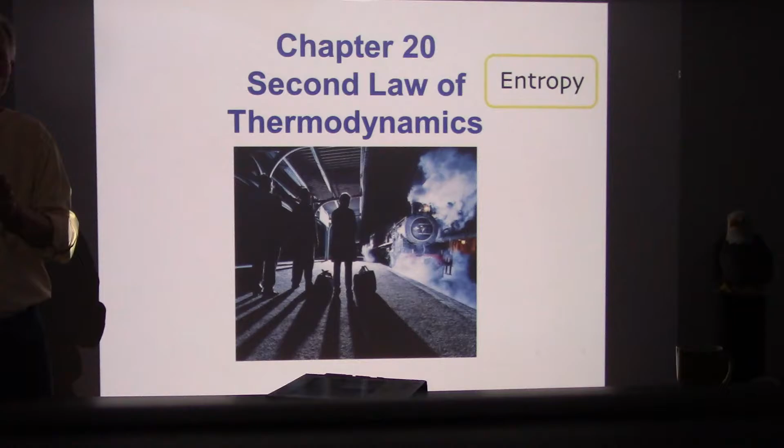Chapter 19 was the first law of thermodynamics, which was energy conservation. Chapter 20 is titled the second law of thermodynamics, and this is a little more difficult to explain. It's based on the principle of entropy. If you've heard about entropy, if you watch different science shows, listen to science blogs or podcasts, then you are familiar with it. Let's get into some of the topics and see what we are getting ourselves into. This is the last chapter of the semester, so this is kind of exciting.

The second law of thermodynamics is a statement about which processes occur naturally and which don't. Does that tell us anything? No, but here's the statement: heat can transfer spontaneously from a higher temperature region to a lower temperature region.

We understand that now because in the higher temperature region, the molecules have above average energy, and in the lower temperature region the molecules have below average energy. Through random transfers of energy, the energy statistically evens out to what we consider the statistically most likely distribution. Back in chapter 18 we looked at that in some detail with a collection of gas molecules. So entropy is actually based on statistics.

So what we've got then is that the faster moving molecules are allowed to come into contact with the slower moving molecules, and statistically, on average, these start to pick up speed and those slow down. We call that the flow of heat, but it's really just random molecular motion, and through collisions the energy gets spread around uniformly.

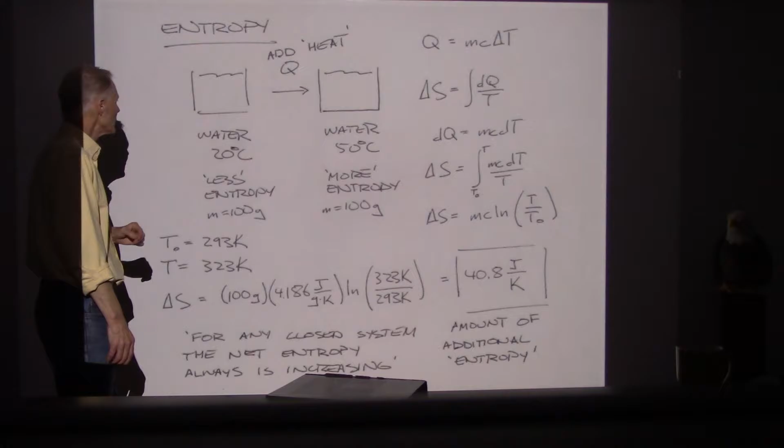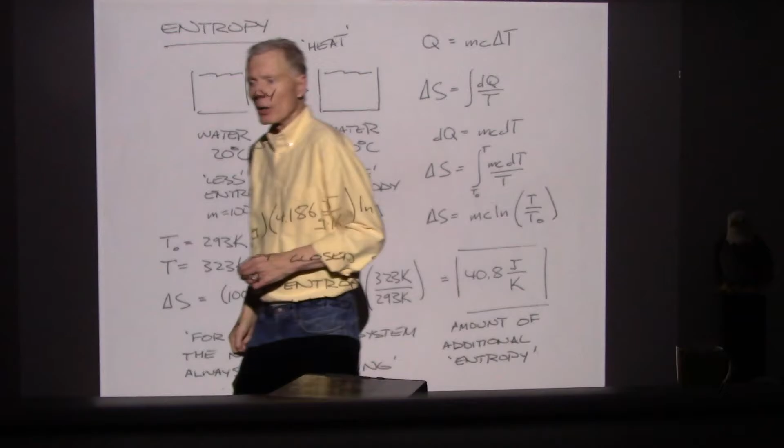So we're going to say that each side of this has a mass of 100 grams. Surprisingly, we can calculate entropy by taking the heat being transferred, dividing it through by the temperature at which that transfer takes place, and carrying out that integration, and that works. It's surprising that we can keep track of this approach to a uniform distribution of energies, the most statistically likely distribution, just by carrying out this integration.

Now the dq in here is going to be mc dt. Substitute that in, and we get a delta S formula that is the mass of the sample times the specific heat of the material times the natural logarithm of the final temperature over the original temperature. Now with these two samples, let's take the one on the left - the original temperature is 293.

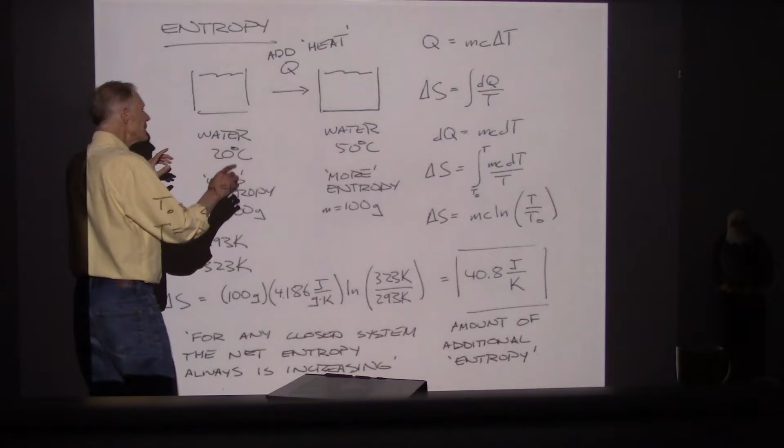Oh, I see what happened - sorry, I thought there were two samples, I guess I wrote this. So here is the sample, we're adding heat in, and we're taking just one sample, not two. We're taking one sample and raising its temperature. What's going to happen in terms of entropy?

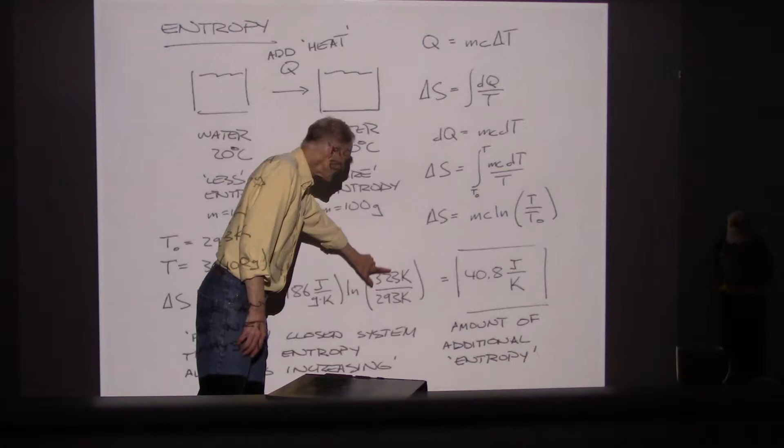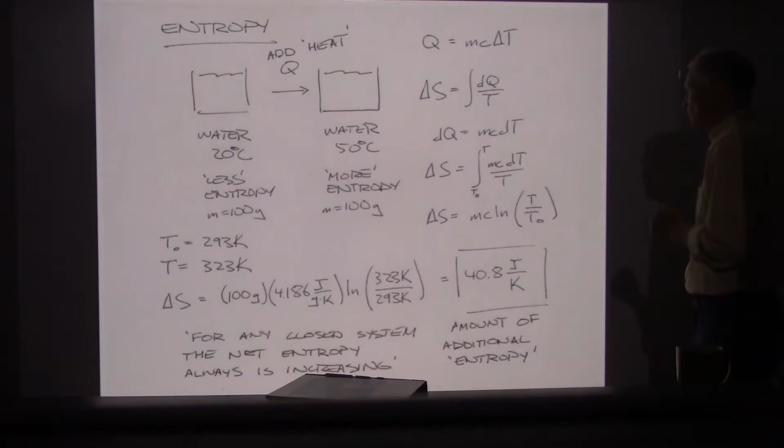So the temperature starts out at 293, it tops out at 323. That is 100 grams of water with a specific heat of 4.186, and to calculate the entropy we need the logarithm of the final over initial temperature. I carry that out, and what I get in terms of units is interesting. As we approach this most likely statistical distribution of energies, that comes out in units of joules per Kelvin - how many joules have we transferred divided by the temperature at which the energy was transferred. It turned out to be 40.8 units of entropy, joules per Kelvin.

All right, for any closed system that we follow, the net entropy always is increasing.

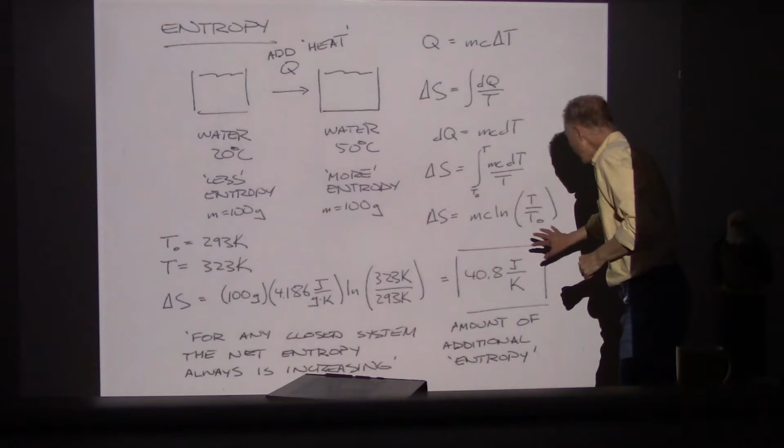Now, in this case, it's not a closed system yet, because we're only looking at one sample. We have to look and see where the heat came from to do a more complete calculation. But as far as this one sample having its temperature go up, that increases the amount of entropy.

Entropy is kind of the central feature here. I think the textbook waits and introduces entropy a little bit later, but I always feel like it's important to get the basic idea of entropy out there right away.

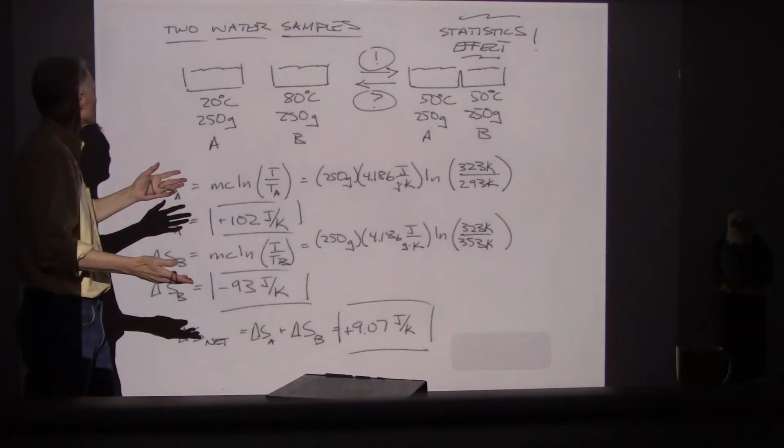So let's try another example. Here's 2 water samples. This one is 20 Celsius, this sample is at 80. There are now 2 samples, this is 250 grams, this is 250 grams. Now I put them in thermal contact. Since the specific heat for water is roughly constant, and we have equal sizes, the final equilibrium temperature will be halfway between, meaning both samples now are at 50 Celsius.

So if I look at sample A, I write delta SA equals MC logarithm of the final temperature, the final equilibrium of 50 Celsius, divided by TA. 250 grams, 4.186 joules, that's the specific heat. Now remember, that's got to be in kelvins, it's a ratio of temperatures. All the formulas we're looking at now, you've got to put the temperature in kelvins.

And again, that's one of the things I'm not very sympathetic about, is putting in Celsius instead of kelvins. So make sure you're very Kelvin oriented, and you know when you're absolutely going to need to put kelvins in. So here's the final temperature for sample A, and here is the original sample.

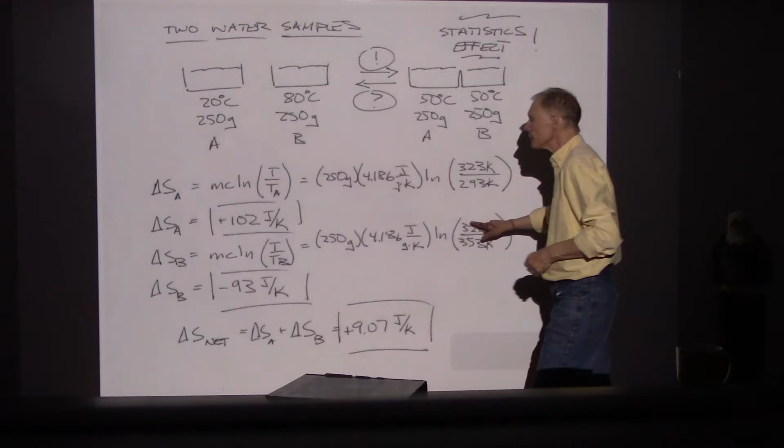Now, calculating the entropy on sample B looks very much the same, except it started at a higher temperature and ends up lower. Carrying out the calculation says the heat went into sample A, and its entropy went up. But sample B lost heat. Heat transferred away from sample B, and its entropy went down. So it's not as randomly distributed, or rather, it just doesn't have as much entropy.

At lower temperatures, there are fewer options for your molecules. So in general, if you go to higher temperatures, the entropy will go up, because the molecules have more options if you've got more energy. And that means they can reach different speeds and kinetic energies that weren't accessible to them before, and that means the distributions of all the kinetic energies represent more entropy.

So sample A boosted its entropy by 102. Now when we finish, they both have the same amount of entropy and energy, but the entropy in sample A went up by 102, and the entropy in sample B went down by 93. Now, why are they different? Because the heat was transferred at different temperatures.

So what that says is anytime we go from 2 samples that have different temperatures and then move toward thermal equilibrium, the overall entropy - if I add the entropy increase and the entropy decrease - it's positive. So a positive number for entropy says this process is not reversible.

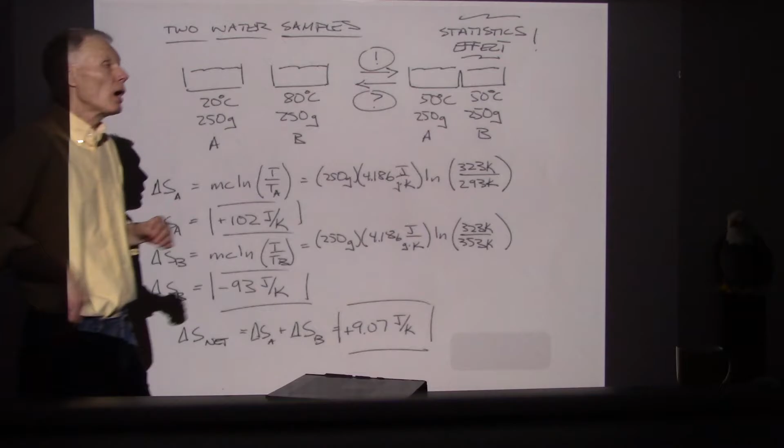Now, energy conservation says why? Energy conservation says that going this direction or this direction, who cares - they both represent the same amount of energy. So the first law is not enough to explain why this process goes from left to right, but it does not spontaneously go back.

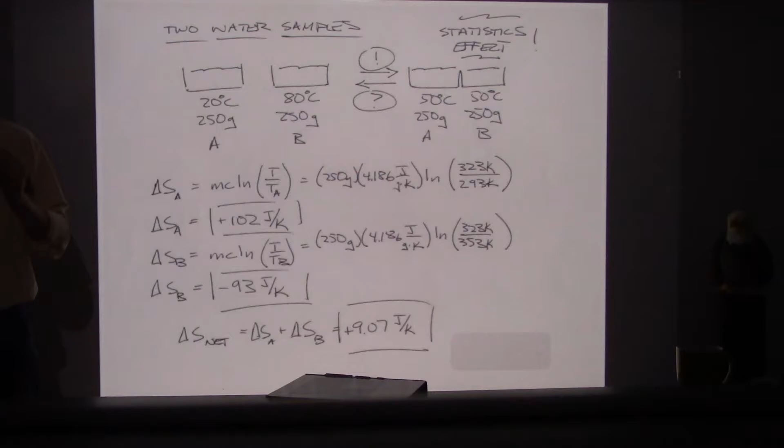Okay? It won't - once you have mixed hot and cold water, nature is not going back. The overall entropy in the universe has gone up, and you can't get back to the entropy levels you had before. So think carefully before you mix hot and cold water. Remember, the universe can't go back to the state it was in before that happened.

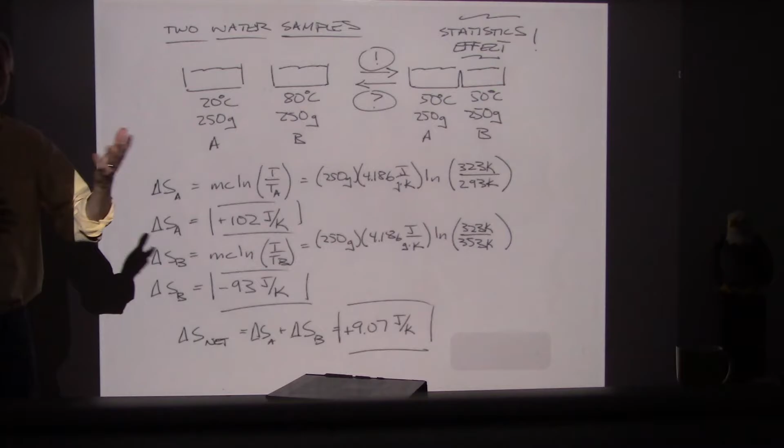So this is a statement from the second law saying that because the entropy went up, statistically, it's very, very, really, very, extremely unlikely that this process could ever reverse itself just by chance. Now, statistically, you can calculate the probability that the molecules will rearrange themselves with all the higher kinetic energies on one side and the lower kinetic energies on the other side. And the chances of that happening are enormously tiny.

All right, now, how can we use this principle of entropy? In this chapter, maybe the most important part, in addition to understanding entropy calculations themselves, is to look at what we call heat engines. So we operate a lot of heat engines.

Heat engines consist of some kind of combustion chamber where we're generating a bunch of molecules, some kind of molecular system that has a lot of energy, something at a really high temperature. Then we allow that high temperature region to transfer heat away.

We use that to operate an automobile or a power plant. If the power plant's running on natural gas, I think California still produces half their energy or more from natural gas turbines. Or if it's a nuclear power plant, you generate a bunch of heat and use that to run a turbine and generate electricity.

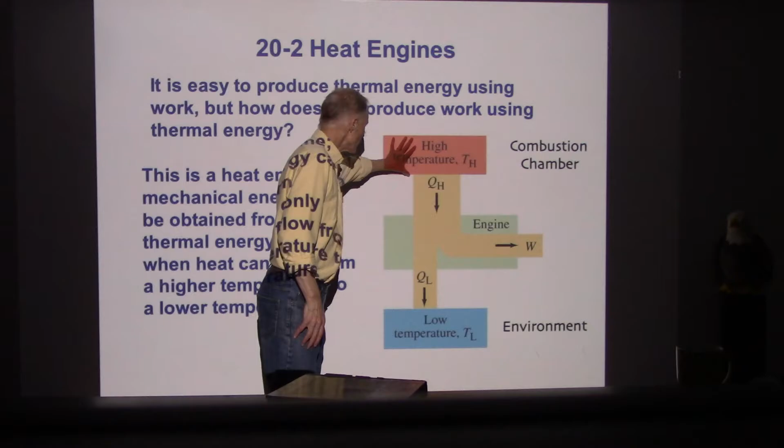So those heat engines, heat transfers away and ends up going into the environment. Now, along the way, some of that high temperature energy that we generated is converted into mechanical energy. That's where the engine part of heat engine comes from. We take some of the heat that is generated and convert it into mechanical energy, and we drive our cars and generate electricity. That's what heat engines are all about.

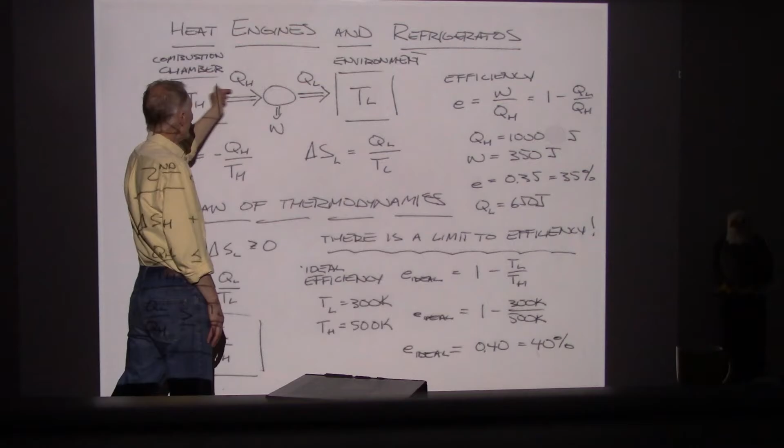Now, when we look at heat engines and refrigerators, let's get back to refrigerators later. Here is the combustion chamber. I like these diagrams drawn in this different orientation, again, it's a personal preference. So here's the high temperature region, TH, and it's transferring heat, a certain amount of energy, QH.

Now some of that energy goes into work, that's the good part. Some of it goes right into the environment. And what we find is it's impossible to get 100% conversion of the heat that we've generated. We can't get 100% of that to go into work.

And we can actually use the principle of entropy, the second law of thermodynamics, to calculate under perfect conditions how high could the efficiencies be.

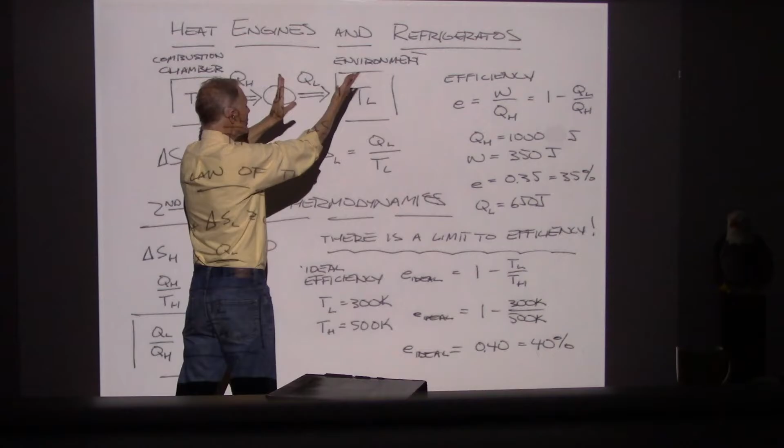So let's say we build this heat engine and we measure the high temperature region, we measure the low temperature region, which is typically the environment. We go in and measure how much heat we're generating, how much work we're getting out, how much heat goes right into the environment, and we can define an efficiency.

So the efficiency of this would be work divided by QH. So the amount of energy we get out divided by the heat that we invested.

Now that can be restated. The work we get out is equal to QH minus QL, since energy is conserved in this process. So that says the efficiency could also be written as 1 minus QL over QH.

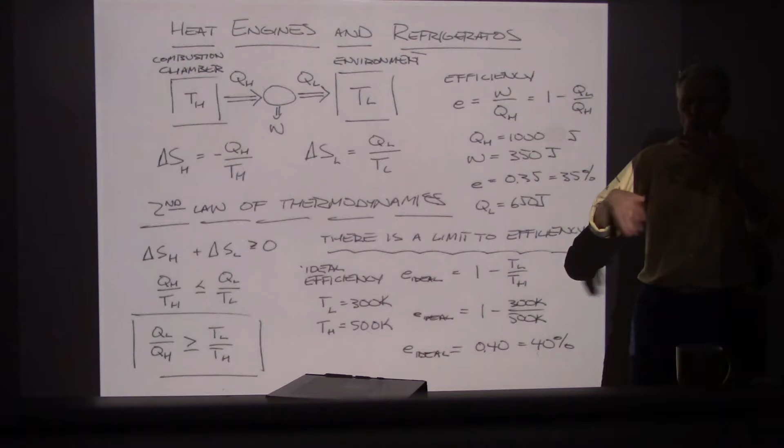Now let's make up some numbers. Let's say QH is 1,000 joules, so we're constantly generating heat. Let's take a 1,000 joule sample of that heat and ask how much work did we generate? Well, let's make up a number there too. Let's say it's 350 joules.

So at first you might look at that and go, oh my gosh, this engine is not very efficient. We generated 1,000 joules of thermal energy, but we were only able to convert 35% into work. Doesn't sound very good. That efficiency would be 350 divided by 1,000, that's 0.35, or 35% efficient.

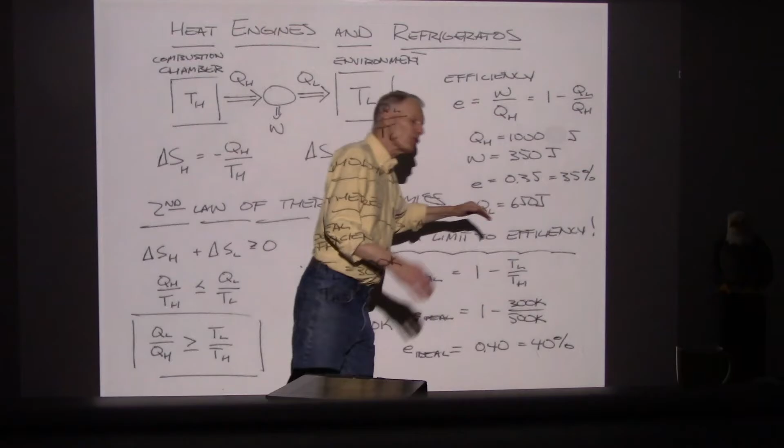Now it says that QL, in this case, would be the remaining energy. So 65% of the heat that we generate goes immediately into the environment, and that's not useful to us anymore. We can't operate a power plant, we can't run our cars, all the things we like to do with all of this energy that we're generating all the time. That's 650 joules, that's just random thermal energy now, just internal energy of the molecules scattered throughout the environment.

Now, if we add to this diagram, let's bring in the second law of thermodynamics and calculate entropy changes. Every time we transfer heat away from the combustion chamber, that's a reduction of entropy. We can write that as the heat divided through by the temperature that it transfers.

So this becomes a formula. We don't have to use the integration, we're going to assume for the heat engine that the operating temperatures are constant. So we ignore the integration, we use a constant temperature, which means we can bring the temperature outside, and then it just becomes QH over T, but with a minus sign.

So the entropy here continually drops. Now we keep creating more entropy by burning more fuel, but every time we send some out, that's a drop in entropy. There's an entropy increase in the environment happening because we're transferring energy there.

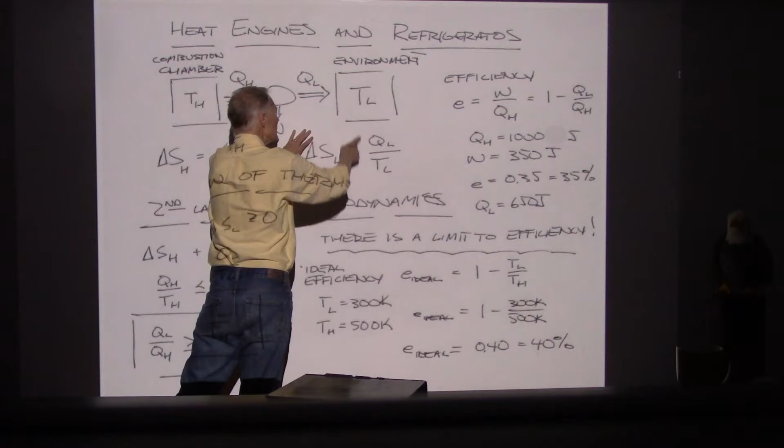Now, what the second law of thermodynamics says is, statistically, I can't generate a bunch of random kinetic energy and then organize 100% of that into work.

If I create a bunch of randomly moving molecules at high energy, the entropy increase when I transfer out the QL has to be at least as large as the entropy drop. So what we can do is this: under ideal conditions, the entropy increase of the environment has to match the entropy drop as the

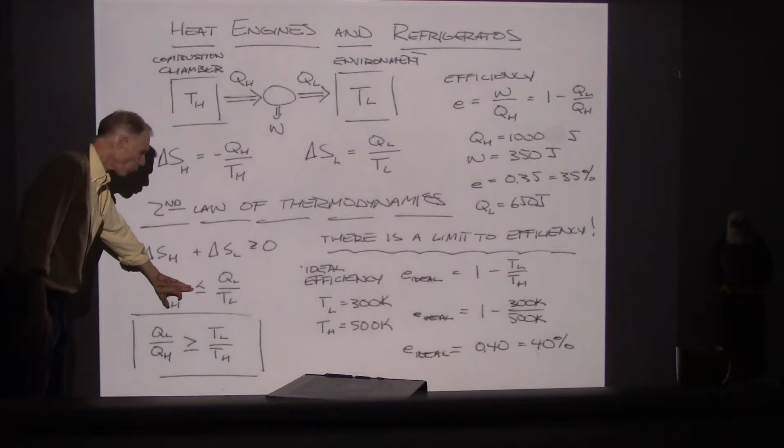heat comes out of the combustion chamber. And that says delta SH plus delta SL has got to be greater than or equal to 0. And that says that QH over TH is going to be less than or equal to QL over TL. And that says that QL over QH has to be greater than or equal to TL over TH. It says that there's always going to be a minimum amount of energy that goes directly into the environment.

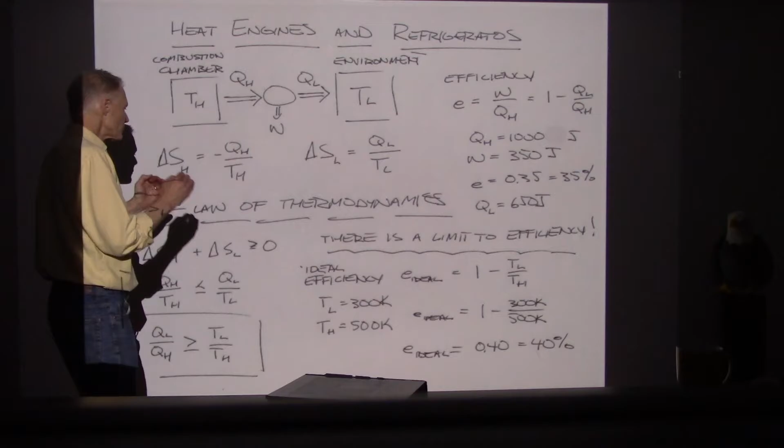Now, ideally, the second law says the best we could hope to do is QL over QH equals TL over TH. So when we're thinking in terms of theoretical efficiencies, what's the best we can hope to do? Instead of working directly in terms of the Q's, that formula is in terms of the temperatures. So when I look at the operating temperatures, that's going to tell me what the best efficiency could be. So let's make up some numbers there too.

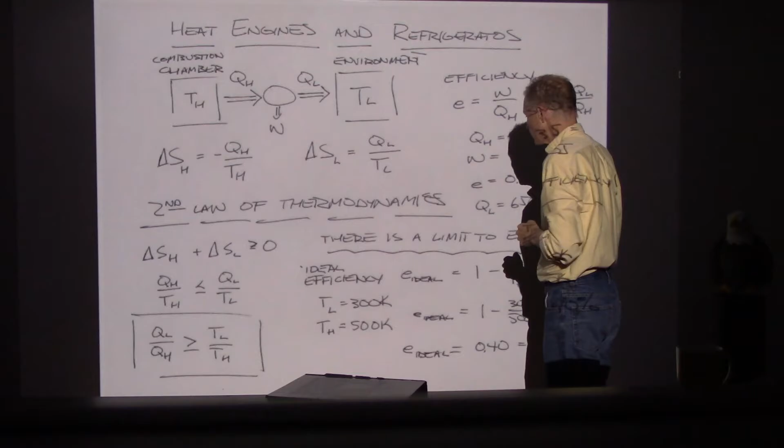Let's say the combustion chamber is at 500 kelvins and the environment is at 300 kelvins. That's where the QL is going, the depository. Under ideal conditions with these operating temperatures, 1 minus TL over TH says that for these temperatures, the best efficiency we could ever hope to get would be 40%.

And again, it comes down to absolute temperatures. We're already in an environment at 300 Kelvin. We really can't get the environmental temperature to go much lower, since we're going to be building our power plants and operating our automobiles in this environment. So the idea is then to build combustion chambers that operate at really high temperatures.

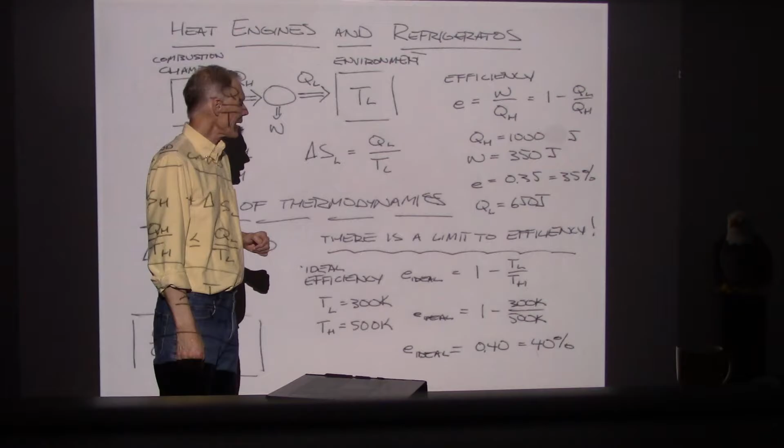So we could do that. We could go to higher temperatures, and that would boost the theoretical efficiencies some amount. But still, we're not going to reach temperatures high enough to get these efficiencies anywhere close to 100%. So this is actually pretty good. If we have a power plant that's operating at 35% efficiency, we're feeling pretty good. That's a high efficiency power plant.

Now, ideally, we would move away from heat engines, since heat engines are primarily being driven by fossil fuels, and that's putting out a lot of carbon dioxide. So in that sense, we want to move away from heat engines and replace them with things like hydroelectric, solar, voltaic energy sources, wind power. Those don't have the limitations of heat engine efficiencies, and they're not dumping a lot of carbon dioxide into the atmosphere. Now, nuclear is also an option, and then you have to decide, do we really want to deal

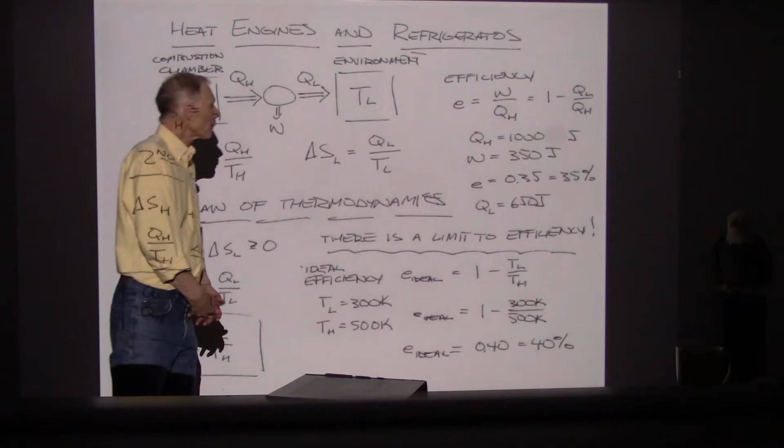with nuclear waste material? Do we trust ourselves enough to say that we could generate tons and tons of radioactive material and keep that safe for generations to come? And I feel like that's a bit of a risk too. We have these alternate energy sources out there. I'm in favor of using the alternates: wind, solar, geothermal, hydroelectric. So those seem like the sources we want to convert to. Also with the automobiles that we operate, we don't want to run those off of fossil fuels either. So in that sense, the heat engines, maybe we want to move away from them.

Now what we're going to do is take a look at a couple different heat engines, and we're going to look at heat engines that operate in a repeating cycle. Now, even though this is a repeating cycle, many of the features we use here will apply to something like a power plant. A repeating cycle is more like an automobile engine, an internal combustion engine, where we have pistons moving back and forth.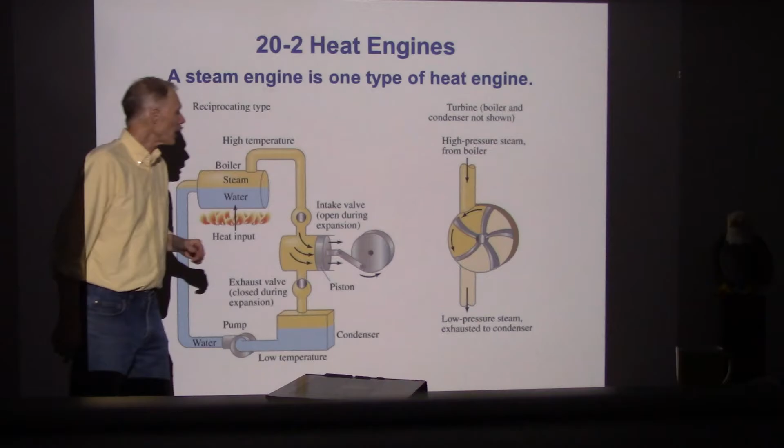High pressure steam comes through, it's allowed to come in, push a piston, and then it's allowed to leave, and then we condense it. And then we bring the coolant, the water, back around again. And so we get these periodic pushes that provide mechanical energy. Similarly, or differently, in a turbine, we can just take the high pressure steam and run it through some kind of a propeller system and just continuously generate that mechanical energy.

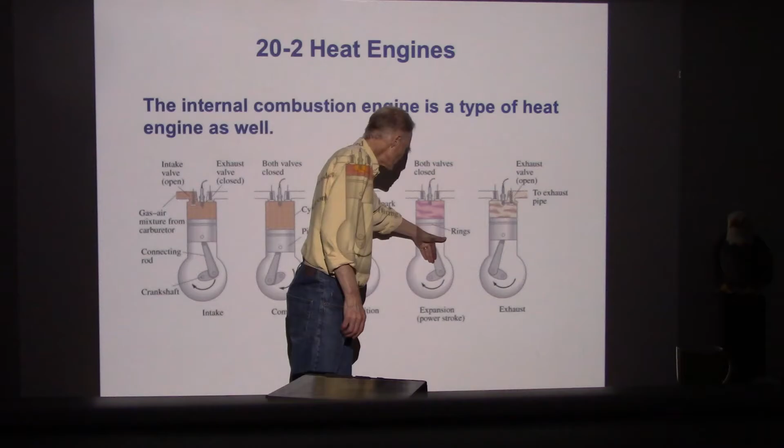Here are the individual stages, the steps that take place in an internal combustion engine in a car. We're compressing the fuel-air mixture. Here's where we're bringing it in, and then we compress it. I'm not so sure about the pictures here. And then once it's compressed, we ignite it, create a really high pressure, and that pushes down very forcefully. So to get energy out, we need to push the piston down much more forcefully than what was required to compress the fuel-air mixture, and that's very easy to do with the chemical reactions using gasoline.

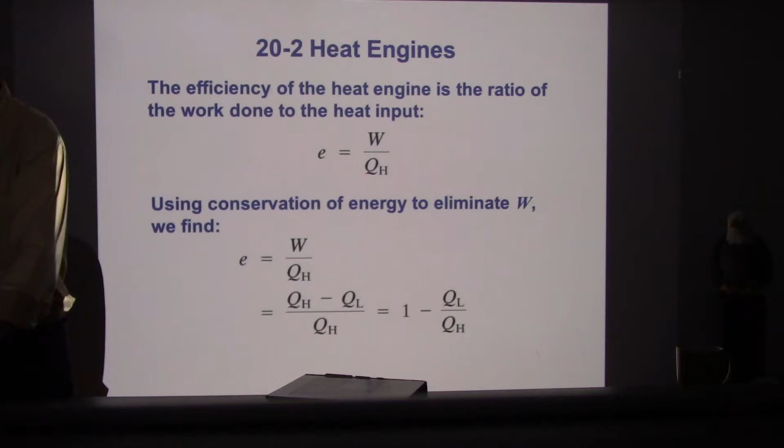So the energy, the efficiency, as we said, is W over QH. And it can be written, so this is kind of a repeat of those formulas. And what about car efficiency?

Let's take a car efficiency. Let's say that the engine is 20% efficient. It provides 23,000 joules of mechanical work every second. That sounds like 23,000 watts would be the power of that engine. How much heat is required, how much heat is discharged each second?

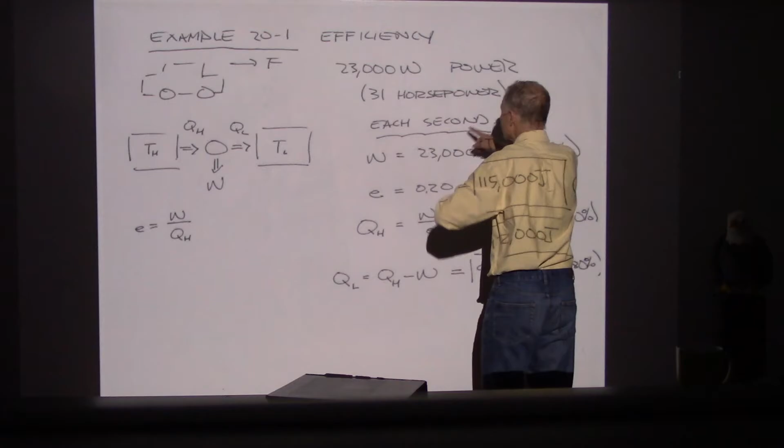And so let's set up our little diagram here. Here's the car taking off. It's a 23,000 watt car. Oh no, I wrote horsepower. Cover that up. Okay, that's 31 horsepower. But more importantly, it's 23,000 watts, and the efficiency is W over QH. Now every second, what we're told is the power is referring to the work being done. So it's the work that we want out of this, and we're saying that that's at a 20% efficiency.

So if that's 23,000 joules at a 20% efficiency, we can divide through by the efficiency, and that tells us that QH needs to be 115,000 joules. It needs to be 5 times as much. Now I'm guessing these are probably representative numbers as to how efficient a fairly efficient automobile internal combustion engine would be. So this is 100% of the energy we have to work with. 20% of it went into work, and that says the remaining 80% is going to go right into the environment as we operate these engines.

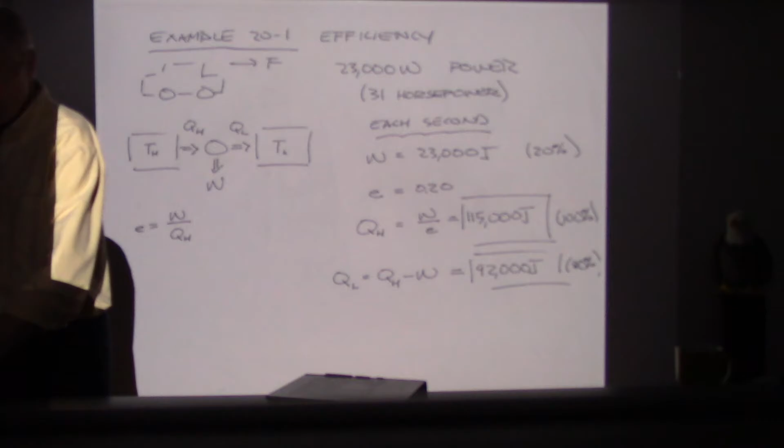So maybe by the end of today's lecture, you guys will all be committed to buying an electric car. I know they're expensive. To buying an electric car.

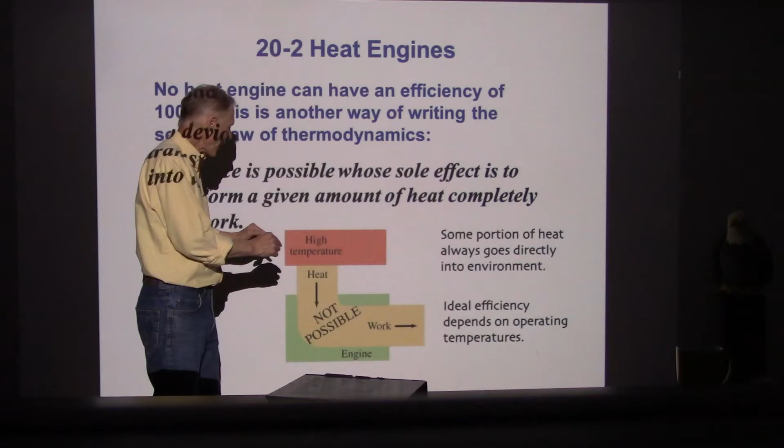Now, going back to how does this apply to entropy, and we've already kind of talked about this, that entropy says that when we generate a bunch of heat, it is not possible to convert that heat 100% efficiently into work. We're only going to get some fraction of that. Maybe a power plant is 30-35% efficient. Maybe an automobile engine is 20-25% efficient. So some portion always goes into the environment, usually the larger portion, and the ideal efficiency will depend on operating temperatures. Those are kind of the takeaways from this.

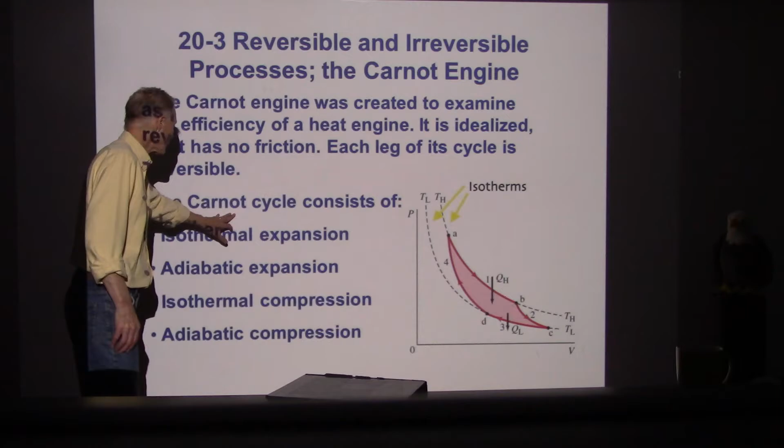Now we're going to look at a couple of cycles in some detail. This is probably more involved than you guys are really required. Take a look at the homework problems. I think there's some simpler examples there. But we're going to look at what's called a Carnot cycle. And that's at least in part because the Carnot cycle gets used as a reference when we're talking about heat engines and efficiencies. And so let's take a shot at this.

Now also, where these heat engines are actually very useful is there are devices called heat pumps, which you may be aware of, that is an alternative to other types of heating systems for homes or buildings of other types. And if you're using a heat pump, what we're going to find is the heat pumps can be extraordinarily efficient. And the heat pump processes are related to the heat engine processes. So let's take a look and see how this works. We could think of this as a Carnot heat pump. And so let's see what we've got here.

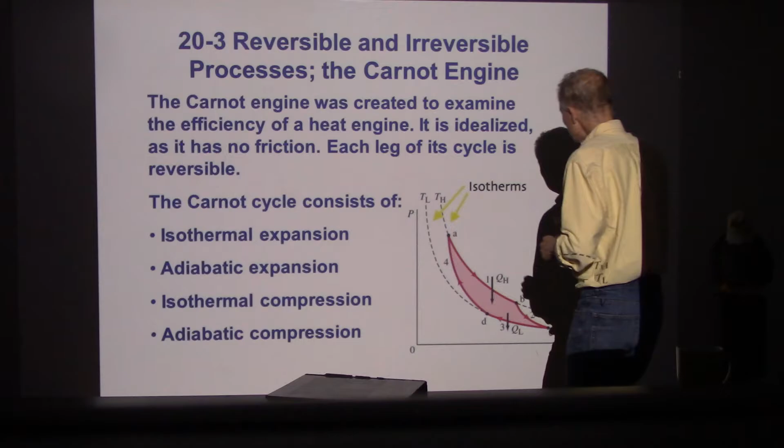Carnot cycles operate between two different isotherms. There's a low temperature and there's a high temperature, and that's why we like analyzing the Carnot cycles. What we find with the Carnot cycle is the QH enters the device at a fixed high temperature, and the QL leaves the device at a fixed low temperature.

That means it's very easy to take numbers from a Carnot cycle and plug them into our efficiency formulas that we've developed. So there's an isothermal expansion from A to B, an adiabatic expansion from B to C, an isothermal compression from C to D, and an adiabatic compression from D to A.

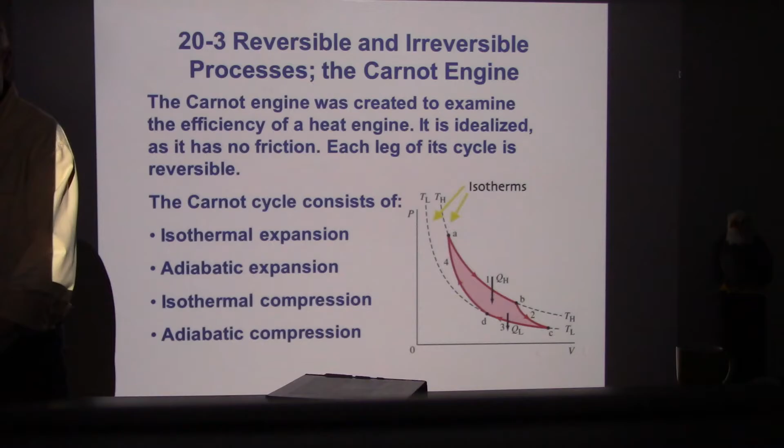During the adiabatic processes, there is no Q - there's only work involved in those. So here's how it works. Here is from A to B, that's one of the isotherms, at the high temperature. Now there's another isotherm from C to D, that's at the low temperature.

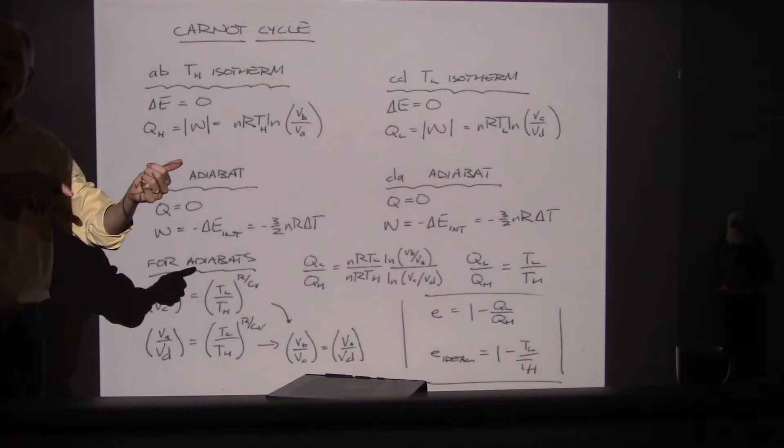For the isotherms, delta E is 0, and QH is equal to the absolute value of work. So QH here is nR times high temperature, ln of VB over VA. Now the way QL and QH are defined, if you go back and look at the last few slides, they're both defined to be positive numbers, and then we put minus signs into the formulas as needed. So QH is an absolute value, as is QL, which is nRTL, ln of VC over VD. Okay, so those are the isotherm values for QH and QL.

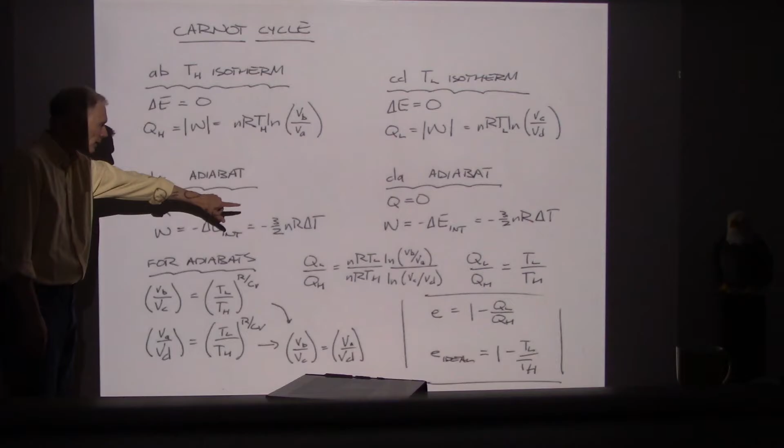From B to C is an adiabat. Now for an adiabat, and so is D to A, the Q's are 0, which means the work is minus the internal energy change. That says the work will be given by minus 3/2 nR delta T. Now here I'm using their convention - I don't want the minus signs to confuse us - but this is how much work there is during this adiabat, and then how much work there is through D to A.

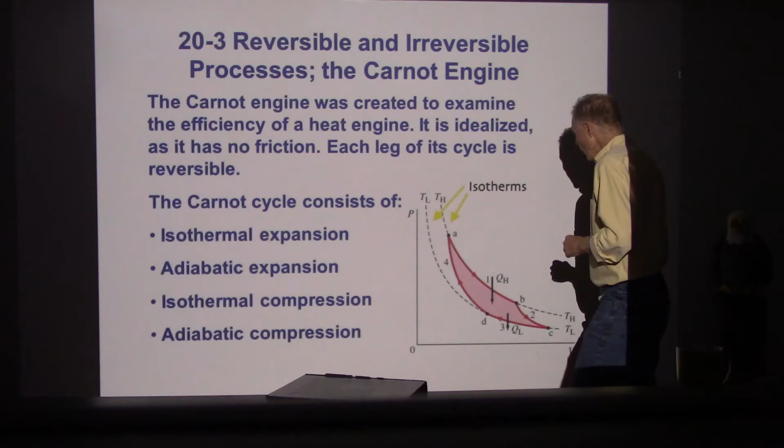Let's go back and take a look at a picture. Where is the work coming into the process, and where is the work leaving? We want the work leaving - that's the work the engine is providing for us - to be really big. When we're allowing the gas to expand, that's where we're getting a lot of work. So we're getting actually a lot of work along the isotherm, and then we're getting additional work here.

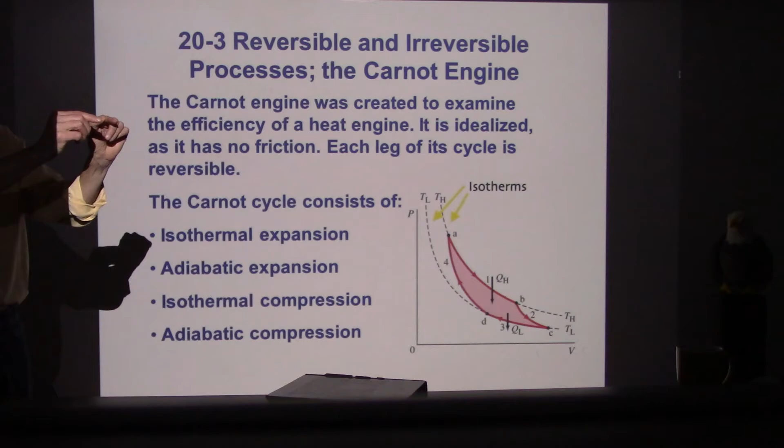When we reset the engine, the reset is done at lower pressures and lower temperatures. The expansion is happening at higher temperatures and higher pressures. That means the net work each cycle is equal to the area within the closed loop. So the mantra for this becomes, for a heat engine: expand at high pressure, that gives you a lot of work output, and then reset at low pressure. Expand at high pressure, compress at low pressure. However much area we can build up within that PV diagram will tell us how much work we're getting out of each cycle.

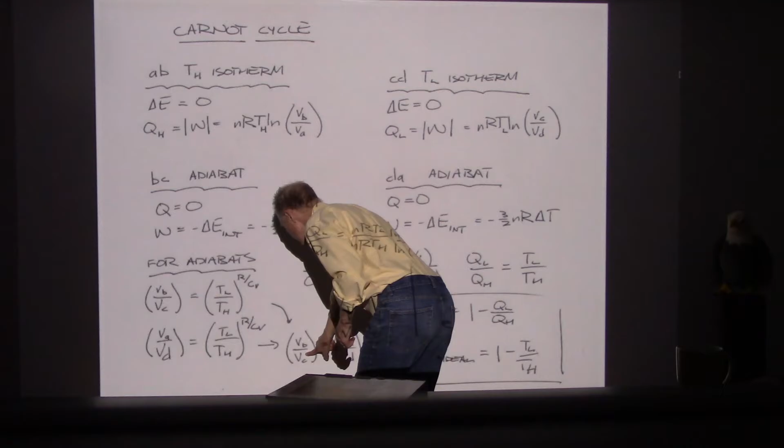Now I'm going to bring in those adiabat formulas. I know these are traumatic, but what we're able to do from the adiabats is show that the ratio of volume B to volume C, and volume A to volume D, are the same ratio. So volume B to C, that ratio of volumes during the adiabatic expansions and compressions, is equal to this ratio - the volume ratios are the same. Now we can flip those numbers around and say that VB over VA is equal to VC over VD. So it's a little bit of an algebraic trick.

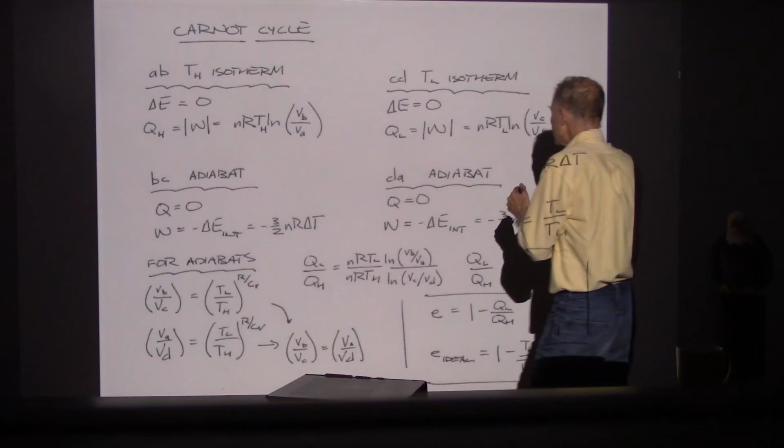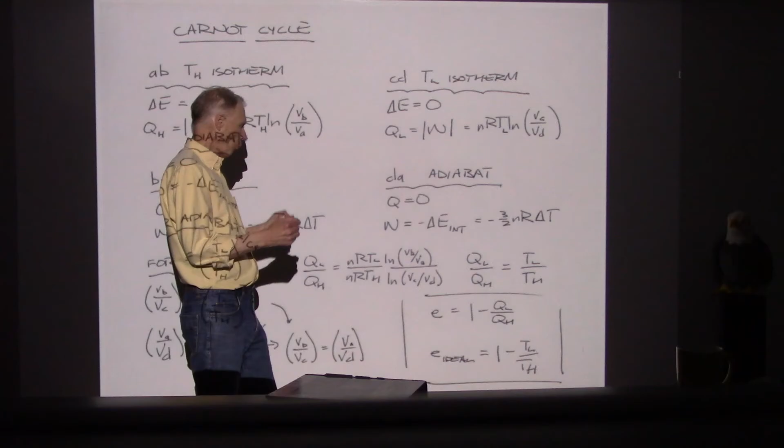Now the efficiency we want for this is given by 1 minus QL over QH. So I'll take QL over QH - those were calculated here - that's going to be nRTL over nRTH times the logarithm of these volume ratios, and those cancel out, those go away. So the nRs go away, the ratios of the volumes cancel out, and it says that for this process, QL over QH equals TL over TH, and that was the condition we said under which the engine is as efficient as possible.

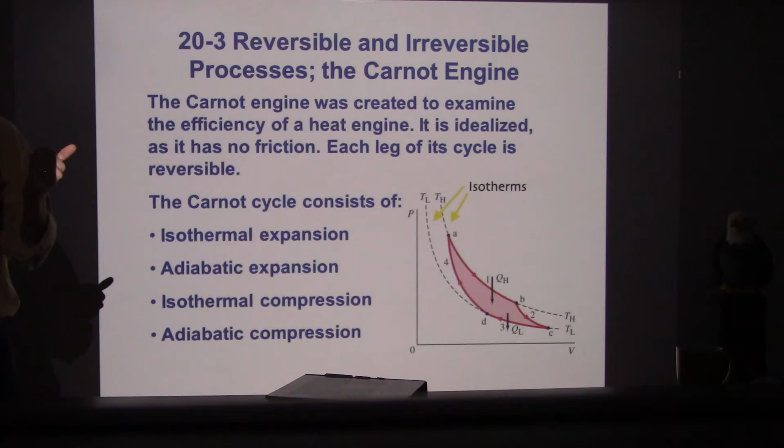That only works if we have the engine operating where all along that path there is a well-defined temperature and a well-defined pressure at each point. When you have a rapidly operating engine, these PV diagram analyses become a little bit idealized. When we actually operate the engine, the efficiencies aren't going to be as large as what we have plotted out ideally on these diagrams, but still, that's where we are aspiring to.

Okay, so we went through that Carnot cycle. I hope that was reasonably painless. So for this Carnot cycle, it's very easy to show the ideal efficiency is 1 minus TL over TH. And again, real engines are going to have frictional losses.

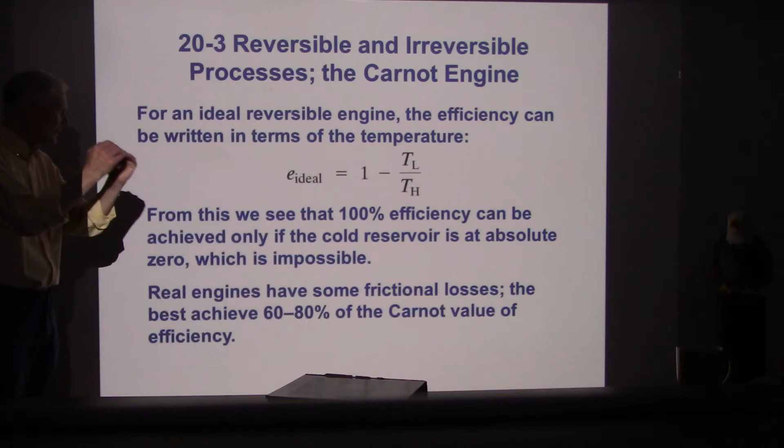The best real engines, they're saying, are only 60 to 80% of the ideal Carnot efficiency that we've calculated.

Here's a claim. Someone comes in, you're working at the patent office. Albert Einstein worked at a patent office, right? So that's a good thing to put on your resume. Somebody brings in an engine and says that the heat generated is 9,000 joules at 435 Kelvin, and the output is 4,000 joules at 285.

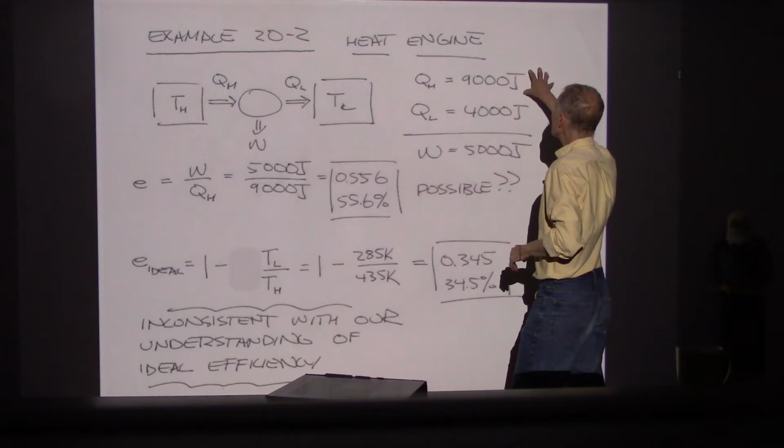Are you suspicious of these numbers? So you get out your heat engine diagram and go, okay, QH is 9,000, QL is only 4,000. Wow, I am getting 5,000 joules of work from 9,000 joules input. That says the efficiency of this engine has been measured to be 55.6% efficient.

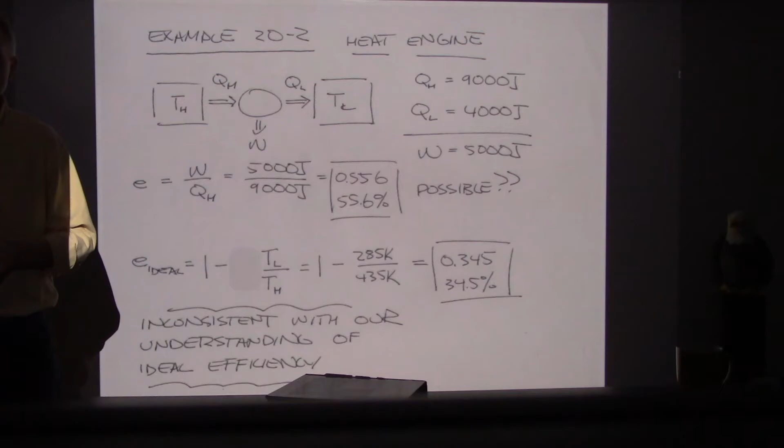That's really extraordinary. If you're the patent office, you're supposed to keep an open mind and say, wouldn't that be extraordinary if this is true? Then you say, this has got to be different from any technology we've looked at before, because no heat engine has ever been this efficient. Let's look at the operating temperatures.

Using the operating temperatures and the principles of thermodynamics, the second law of thermodynamics, we can say that ideally we would expect an efficiency of 34%. So again, you've got to keep an open mind. Has this person stumbled onto some kind of process we just haven't considered, or is the second law of thermodynamics not as reliable as we thought?

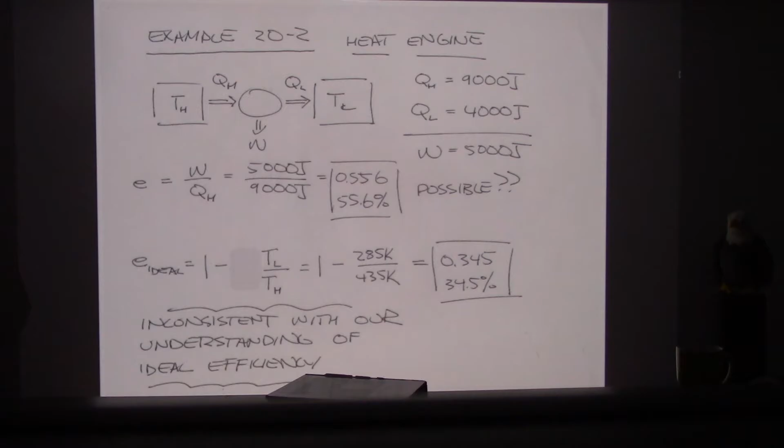Again, it would be extraordinary if this is really the case, but you'd want more evidence. You'd be skeptical at best and want to see this engine in operation. Let's take a closer look. Can you really tell me how you came up with these numbers? It is inconsistent with our understanding of heat engines and how nature works in terms of entropy and entropy increases.

Now there's a second cycle. I know the Carnot cycle was a lot to go through. There's a cycle called the Otto cycle, and the Otto cycle better represents what goes on in our automobiles. Isn't that a coincidence? The Otto cycle actually applies very well to our automobiles.

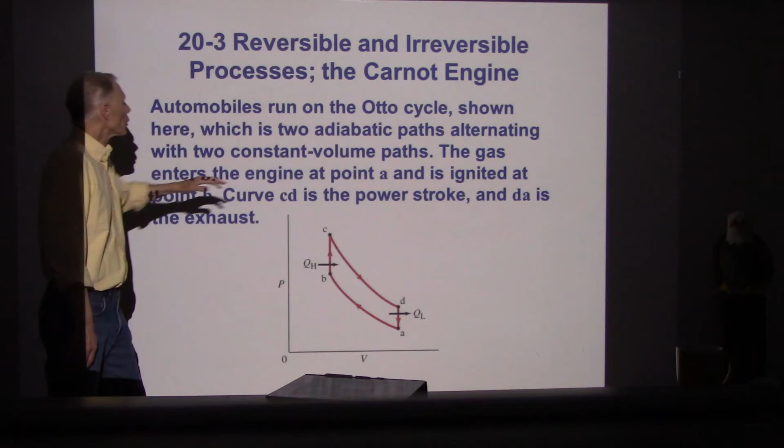That's easy to remember. Now, for an automobile engine, it's better represented with a couple of adiabats. So we're going to use these couple of adiabats again, but they're more in line with a constant volume process. I hope you guys are enjoying these — if you're enjoying them, then you're going, yes, another thermodynamic cycle we can look at. I want to see more.

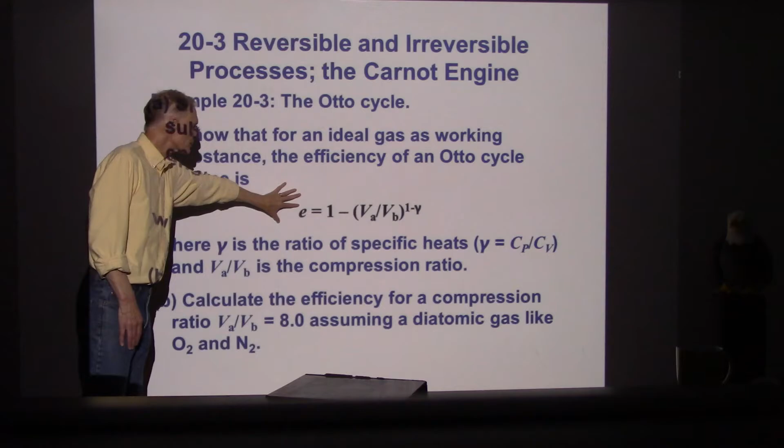So here's the Otto cycle example. They're telling us, let's go through and look at the Otto cycle. They're telling us what the answer needs to be. They want us to demonstrate that formula represents the efficiency, where the ratio of volumes is what we call a compression ratio.

If you're into automobile engines, you know that specifications often include the compression ratio. So if I can get the compression ratio — the ratio of volumes — to be really high for this particular thermodynamic cycle, then the inverse of the compression ratio is really, really small, and I can get the efficiencies to be pretty high.

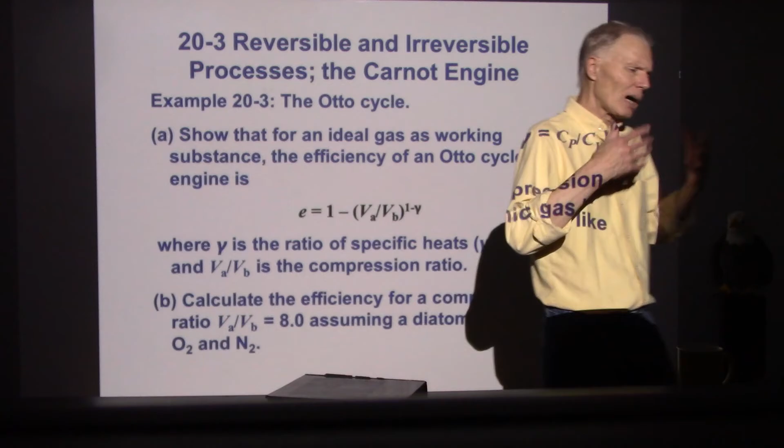On the second part of the problem, they say calculate the efficiency using this formula for a ratio of 8, assuming the gases are diatomic. Now, in an automobile engine, we're getting gasoline, which is like a hydrocarbon — heptane, octane, nonane, these different lengths of hydrocarbon molecules. We're combining those with oxygen to create water and carbon dioxide. Doesn't sound so diatomic, but anyway, we're going to use the values we've come up with for diatomic molecules.

I'm very excited about this thermodynamic cycle. So here it is — here is the Otto cycle. Now remember, these are adiabats, so there's no Q at that point. But during the constant volume processes, we've got a lot of heat coming in.

Now, since these are constant volume processes, notice that VB and VC match, and VD and VA match. So I hope you're starting to see the pattern here with these kind of theoretical, idealized thermodynamic cycles. The way we are able to get through all the algebra is by recognizing where the temperatures are the same, where the volumes are the same, whether the pressures match up, and looking for a way we can start canceling out some of the numbers in the formulas.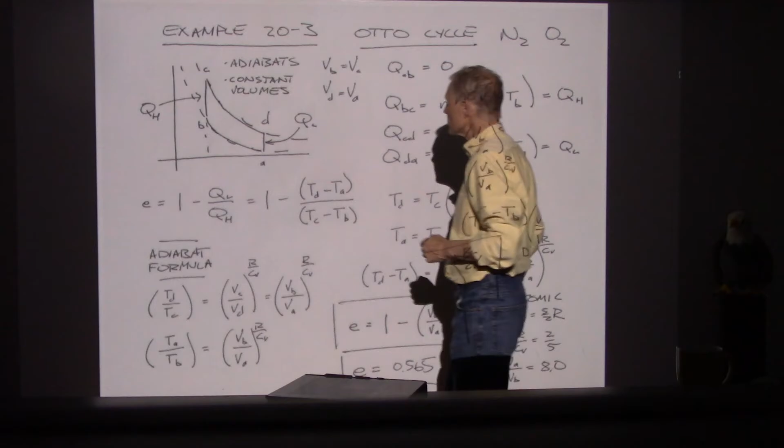Now I wrote the temperatures high to low, because I want to keep these positive. Remember QH and QL, we use those as positive numbers and then put in negative signs as needed. So in our efficiency formula, QL is an amount, QH is an amount, and that minus sign we just put in by hand so we can see it clearly. There are no hidden minus signs. No hidden minus signs is often a good strategy to avoid errors. So we got the minus sign out where we can see it.

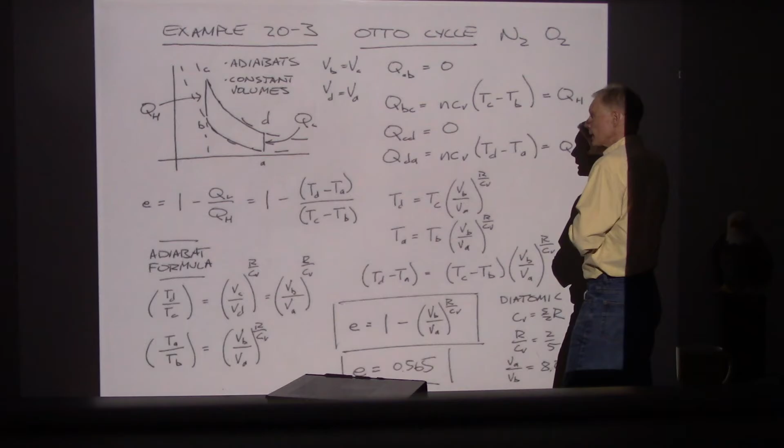Now in this case, the QH and QL formulas look pretty similar again. So when I substitute those in, the Q's from the constant volume processes, I'm getting 1 minus TD minus TA over TC minus TB. So I've got it reduced down to a set of temperatures. Now, it looks like all 4 of those temperatures are distinct, so we're going to have to move on to the adiabat formula and see if there's a way we could solve this conundrum.

Now, the adiabat formula allows us to make a ratio between the two ends of the adiabat. So the temperature at D, temperature at C, I can write the temperature at D divided by the temperature at C in terms of VC over VD. Now, VB is equal to VC, VD is equal to VA.

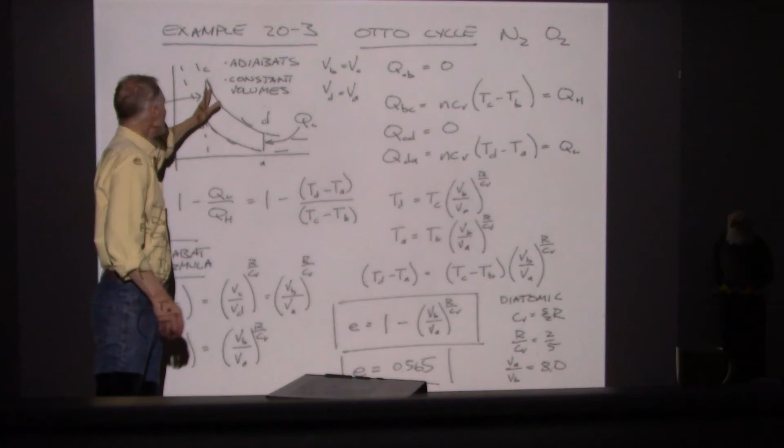So there's one ratio of volumes. This is the high volume, this is the low volume, this is the expanded volume, this is the compressed volume within the combustion chamber. So this is the piston all the way down, this is the piston pushed all the way towards the valves. Okay, so that says we can take VC over VD and set that equal to VB over VA.

So we're using that same ratio of volumes strategy, we can replace the VC with VB and VD with VA. When I take temperature A over temperature B, that can also be written in terms of the compression ratio. And look, what that's telling us is TD to TC equals TA to TB. So again, we found a relationship between the different temperatures.

So let's do this. We can say temperature D is equal to TC times this ratio of volumes, that comes from the adiabat formula, and TA is equal to TB times this very same ratio. So we were able to get the volume ratios. We showed those were the same. So I'm going to substitute this in.

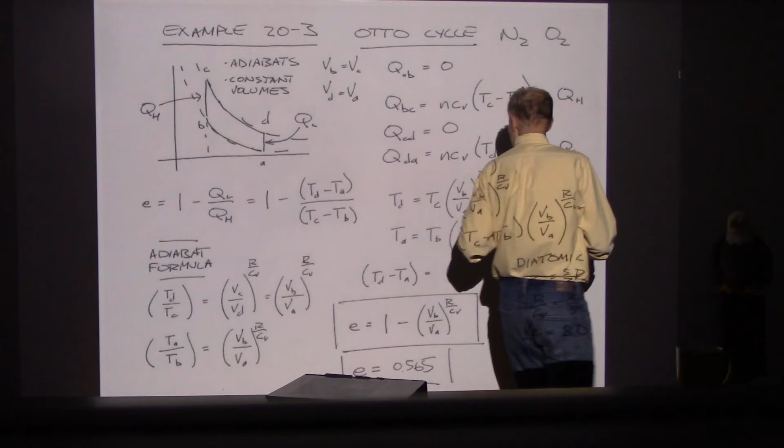I'm going to take this TD, substitute it in, and now that's going to be in terms of TC. And then I can take the TA and substitute that in, that's going to be in terms of TB. So I can take these two temperatures, substitute these two adiabatic formulas in, and that says that TD minus TA can be replaced with TC minus TB times this compression ratio to this power.

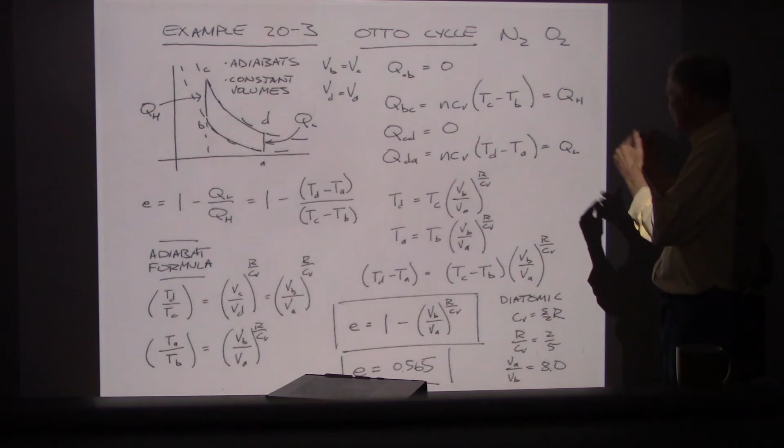Again, if you enjoy doing traditional algebra, this actually brings us back to a lot of the algebra you learn in your algebra classes. How do we manipulate these equations? And it's not just adding and subtracting and multiplying and dividing, it's using a lot of ratios, and expressions to some power. Okay, so for better or worse, that's what we want to be able to do.

So I can substitute that in. I can substitute this expression in. All the temperatures now cancel out, and what's left is 1 minus, there it is, that compression ratio, VB over VA.

I think they had the compression ratio backwards, or upside down. Let's see... oh, they've got it right. Maybe the formula is flipped. They've got VA over VB, and what we've got is VB over VA. So the compression ratio is inverted here.

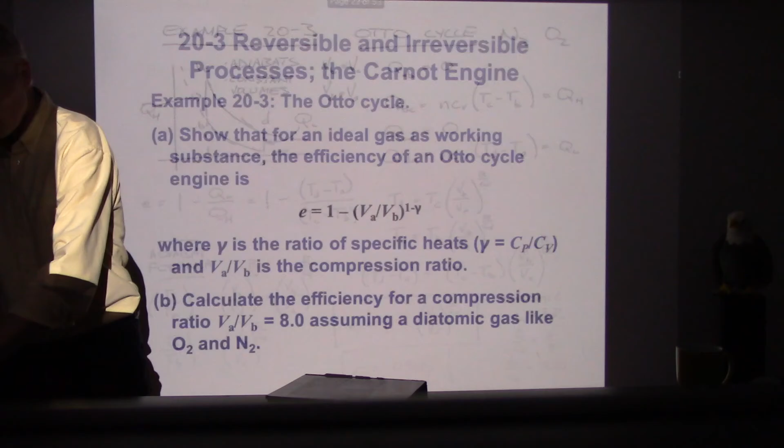Let me go back and see what they probably did. Yeah, they put a minus sign in - they snuck it in. They did not follow our agreement of no hidden minus signs. They put 1 minus gamma, but gamma is Cp over Cv, which is bigger than 1, so that's a minus sign. I think that's confusing.

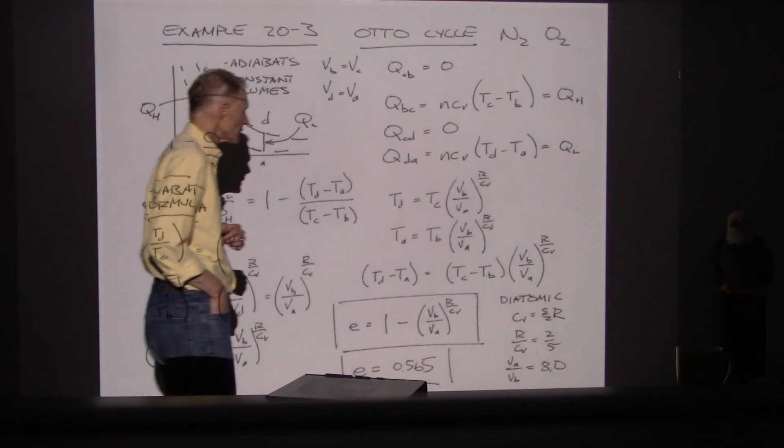Now VA over VB is 8, they told us, and they said this is diatomic. For a diatomic gas, Cv would be 5/2 R, so R over Cv is 2/5. So this is 1 over 8 to the 2/5 power, and it worked out to be 0.565.

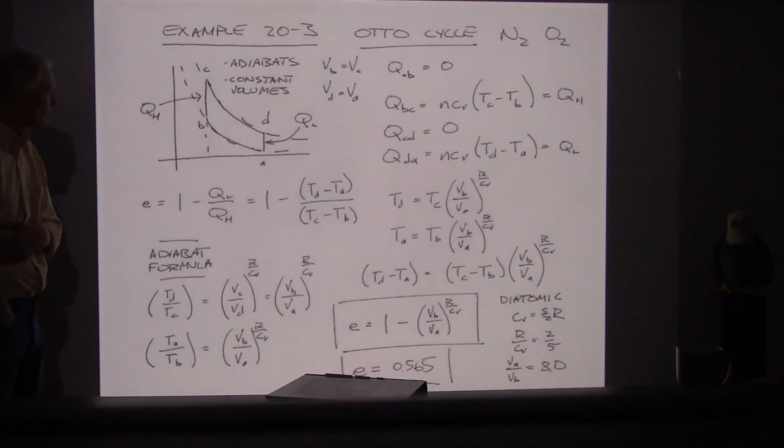So that's a pretty good efficiency - higher than I was expecting. I would like to go in and see what these operating temperatures would need to be. First, we can see that the compression ratio, the volume ratio, is 8.

So I'm wondering how high the temperatures would need to be in the engine to get an efficiency that high, 56%. That's something I'm going to have to go back and work out on my own time, or if any of you want to stop by during office hours, we can take a look at that together.

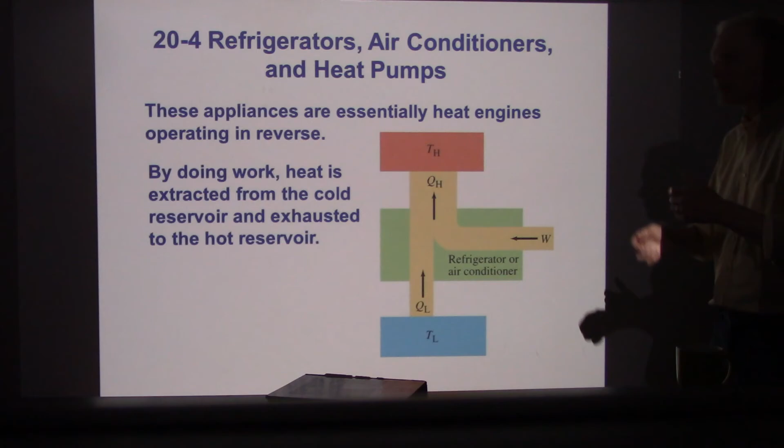Now let's talk a little bit about heat pumps. Heat pumps are heating or cooling devices - they provide both heating and cooling. What a heat pump, refrigerator, or air conditioner does is use a mechanical system, a compressor. You plug in a refrigerator, it operates a compressor, and that creates a mechanism to transfer heat out of the refrigerator. But that's backwards, right? The inside of the refrigerator is cold, the outside is warm. Shouldn't heat go in the other direction? That's what we have to ask ourselves.

So the next item we want to look at is a heat pump. Let's get started - we'll probably stop and take a break along the way. You can see it's the very same diagram we had before. This is a heat pump, here is a refrigerator. So the way it works: you take the power cord and plug it in, and the refrigerator works. It's kind of amazing.

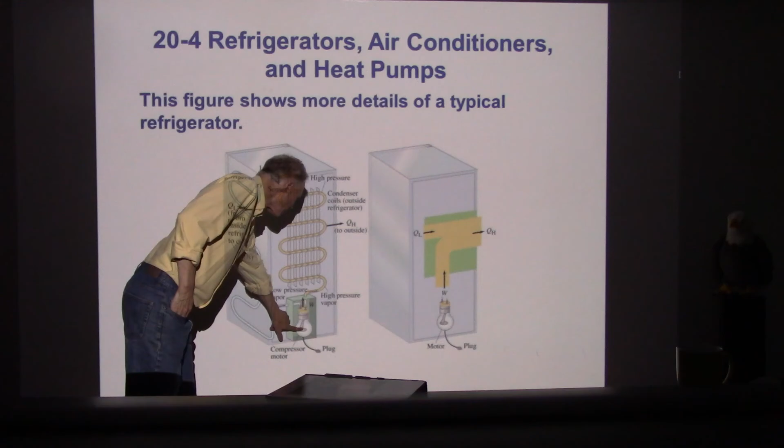The detailed workings are that when you plug it in, it operates a compressor. Here's this compressor operating with this piston - there are a couple valves, and the piston moves back and forth, operated by an electric motor. That's the energy input I have to put into this. It takes a coolant material filled inside this set of pipes, which carry the coolant and cycle it through.

The compressor is used to pump the coolant in this direction, and halfway through there's what's called an expansion valve - just a small, tiny opening that allows the coolant to come out from this half of the piping and enter the other half. Because of this tiny opening and the compressor going all crazy, this side with the coolant goes to high pressure and high temperature. So this side is at high temperature, high pressure.

On the other half of the piping, past the expansion valve, as the coolant comes through, this is called a throttling process, where you take a small opening and let this gas come through. It turns out the molecules lose a lot of energy as they pass through. They can even undergo a phase change into vapor - high pressure vapor on one side, low pressure vapor on the other, but it's the same fluid. It has to do with the potential energy, the attractive forces between the molecules in the coolant.

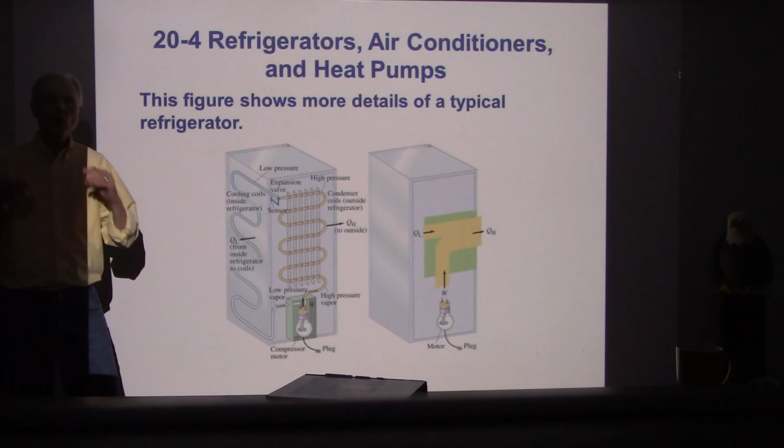Now it's a refrigerator. What should we do with the really low temperature coolant? Let's run these pipes through the interior of the refrigerator. All we have to do is set it up so the temperature of the coolant is lower than the temperature of the freezer or refrigerator, and we can do that. We can find coolants that, as they go through the expansion valve, lose a lot of internal energy, dropping to really low temperatures, drawing thermal energy from inside the refrigerator. These coils run through the interior, then return to the compressor.

On this side, the high pressure, high temperature side, those temperatures are much higher than the ambient temperature of the room, so the heat gets radiated away. It's called a heat pump because effectively we've taken heat away from the interior by running cold coolant through it, and on the other side, the coolant is hot, and that radiates heat into the room.

I've become a real heat pump advocate, not because I just got a refrigerator, but because I recently switched over from a natural gas furnace to a heat pump to heat my home. The same principles are at work.

We have a large compressor outside the house that's operating - it's really quiet and super efficient. It's got a set of coolant pipes that run into the house. To heat up the house, we run the coolant through the pipes, going through what's called an air handler, and then fans blow air past that handler, which heats up the house.

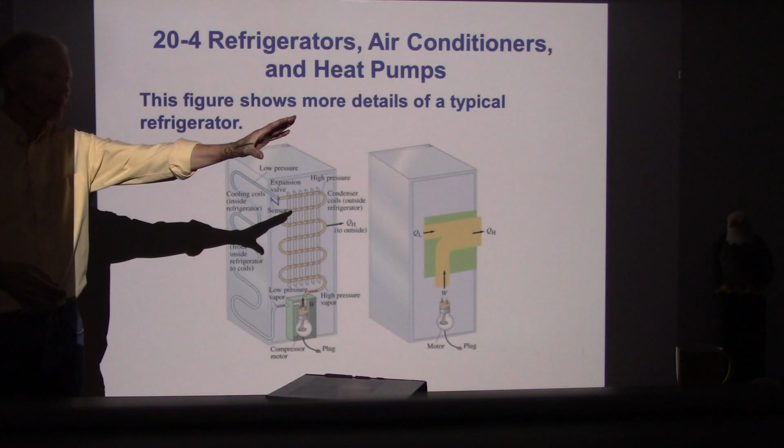Now, the nice thing about heat pumps is they can be used to heat or cool - our heat pump can reverse. There's a valve where if you want to cool it, it switches the direction the coolant is going. So now the high temperature coolant runs through the outside of the house, and the low temperature coolant runs through the inside, cooling the air on the inside. When you go outside and stand in front of the fan on the compressor, it's hot - there it is, it's pumping that heat. Heat's leaving the inside of the house, and here it comes - I can feel it coming outside the house.